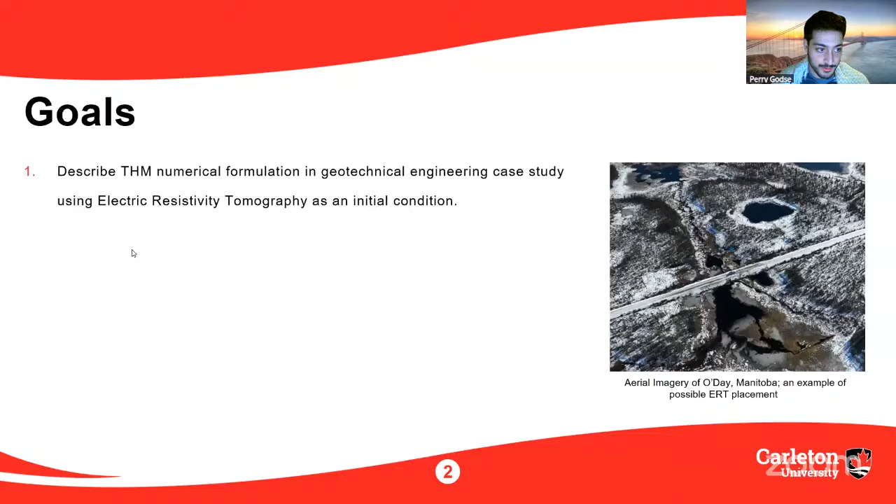Some of the goals I have for this project are to describe THM numerical formulations in geotechnical engineering through a case study using electric resistivity tomography as an initial condition. I want to use the finite difference method on a heterogeneous soil to couple thermal hydraulic behavior, apply thermal hydrodynamic behavior to mechanical coupling, and explore how freeze-thaw-induced changes in hydraulic conductivity feed back on plume migration, and identify where thermal impacts are strongest.

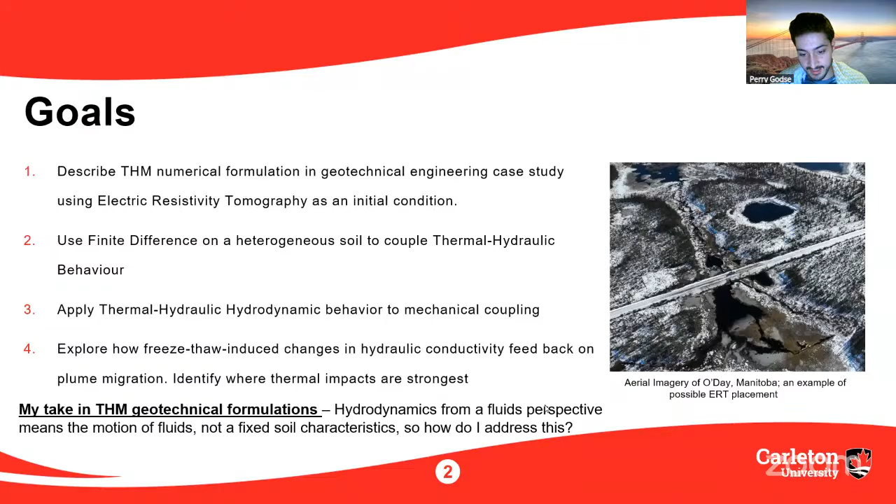My take on THM for geotechnics is that hydrodynamics from a fluid perspective means the motion of fluids, not necessarily a fixed soil characteristic. So how do I address this?

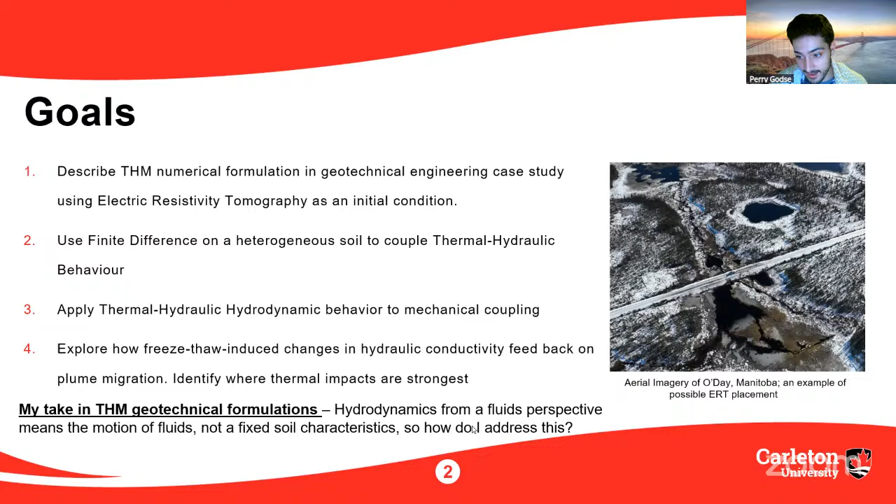Using subsurface terrain resistivity to model THM evolution using this image and the reported soil stratigraphy, we infer and apply constant head to simulate wetland behavior without transient hydrological inputs, apply dual drainage, and model seepage, thermal and mechanical effects with background freeze-thaw settlement and seepage, and then couple it.

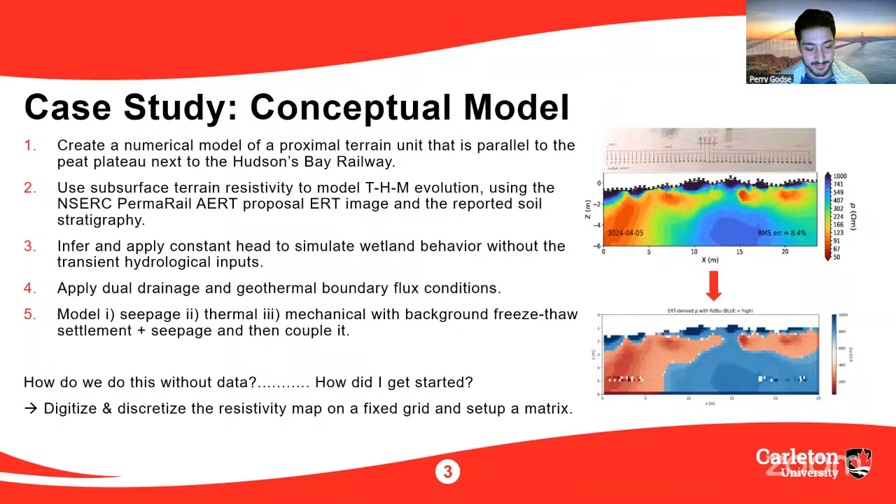So how do we do this with limited data? How do we get started? The first thing is to apply a fixed grid and superimpose it over the image, determine the terrain profile, and then map that onto the fixed grid.

But before we get too deep into this, what is THM and why is it so complicated? Well, THM, really, in terms of coupling, it must occur regardless of how complex it is. For it to be fully coupled, it must be within the same time step.

So we have a lot of parameters here. We can have multi-field coupling: thermal, hydrologic, mechanical processes, which are all interdependent. Each GDE can be second order, first order, whatever you want, and it's coupled with nonlinear terms.

We have multi-scale physics with different time scales, and in terms of different THM approaches, we can have implicit finite elements and finite difference methods. We can have explicit methods. We can have particle methods, like material point method, which somebody else will talk about today. And for THM, we have multi-dimensional behavior, such as 1D, 2D, and 3D.

So today I'm only going to talk about 2D. But the one thing I want to draw your attention to is that THM can be hydraulics, can be thermal, can be mechanical. My approach to looking at this problem is to build it one coupling step at a time to produce a fully coupled finite difference model. But at the end of the day, THM is energy, water, and stresses.

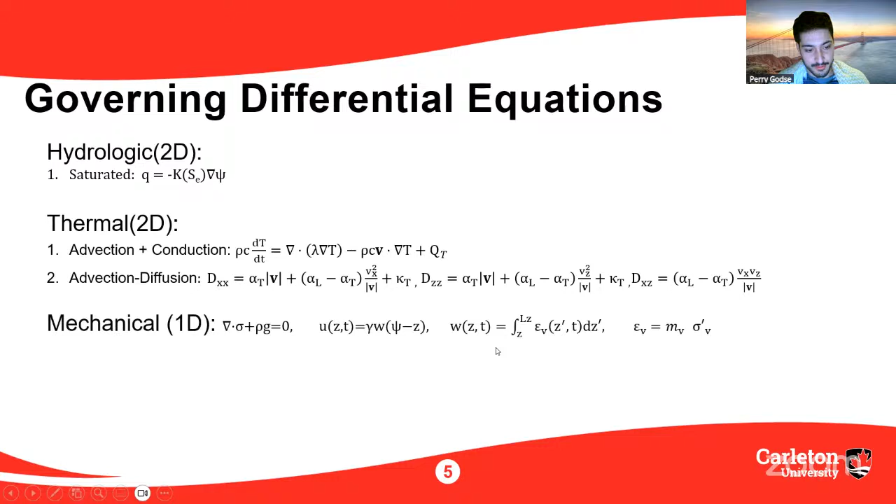So the governing differential equations, the GDEs that I used for saturated conditions, I used Darcy's equation. For the thermal equations, I used advection and conduction, advection and diffusion. And for the mechanical component, I did 1D soil columns where we looked at strains, pore water, settlement, and stresses.

So the boundary conditions, we use dual drainage. In terms of the thermal boundary conditions, we use the thermal penetration wave as both an initial condition and the boundary condition. I call it a boundary condition because at the surface of the soil layer, the thermal penetrating wave, once it hits the surface, it then propagates through the soil.

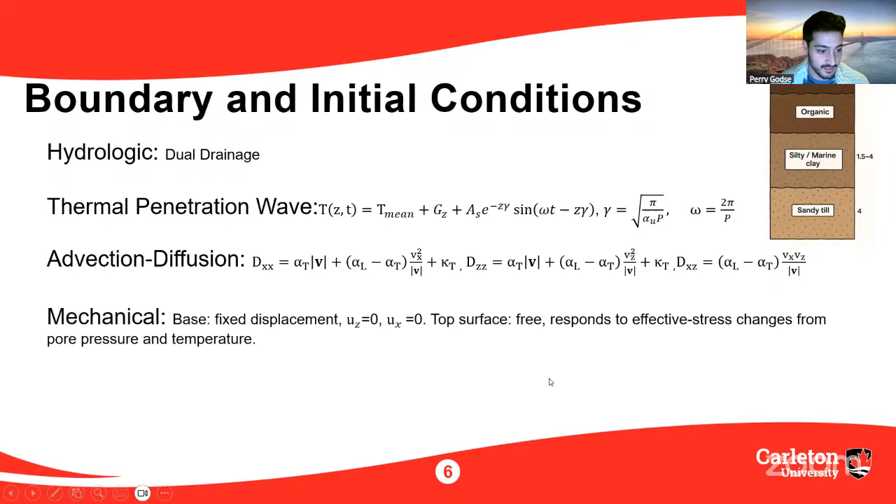So at time 0, it would just be the initial state. And then the same for advection diffusion, where at time 0, if there is no input source, it would just be 0. And then mechanical, it's fixed displacement with a free surface.

And I do want to talk about Archie's law, because in geophysics, one method to relate resistivity to water saturation is using Archie's law. There are some parameters here with some suggested best practices. But at the end of the day, once you compute all this and apply residual water content, you can compute the effective saturation.

So the numerical setup - this is the meat of the numerical model. We have an initialization phase, an outer step, and then an inner step.

So how do we build this? Well, one, build a 2D map. To do this, we import our inputs, read the ERT mask, define the grids, define the time discretization. This was very challenging because the larger the time scale, the more computationally intensive it gets. I chose 5 days - I think that was something reasonable for this model.

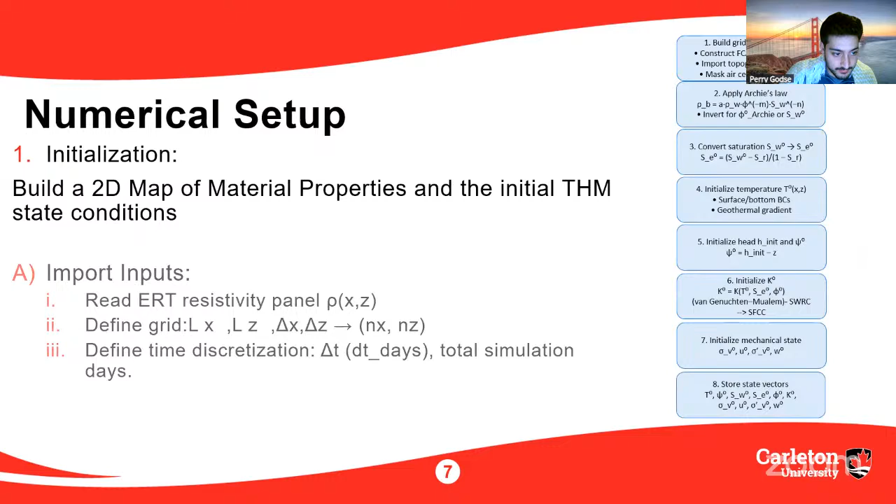So why do I bring this up? Because depending on what your initial temperature is across the depth, and the width of the two-dimensional space, in conjunction with the saturation, it will then dictate the frozen and unfrozen fraction.

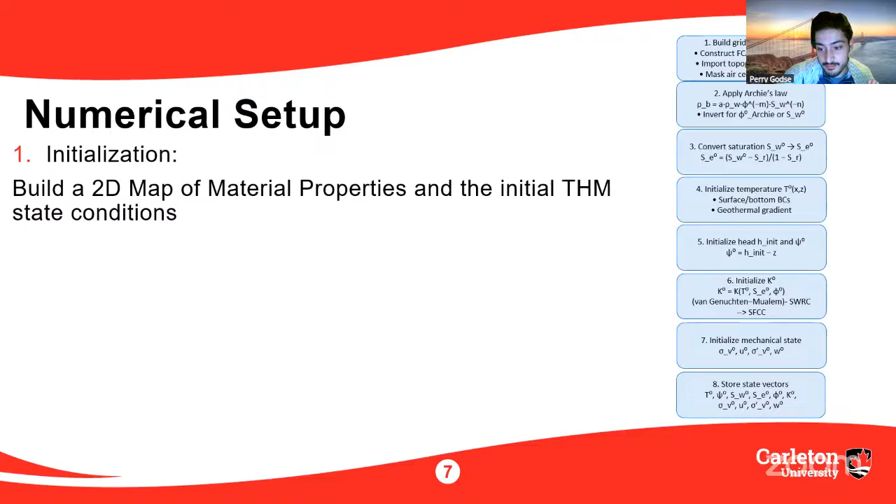This is extremely important for the no-flow boundaries or the partial flow boundaries. This is why I say this sets the freeze-thaw state, because whether it's fully saturated or partially saturated, we then bring in ice content into the mix, which gets a little bit complicated.

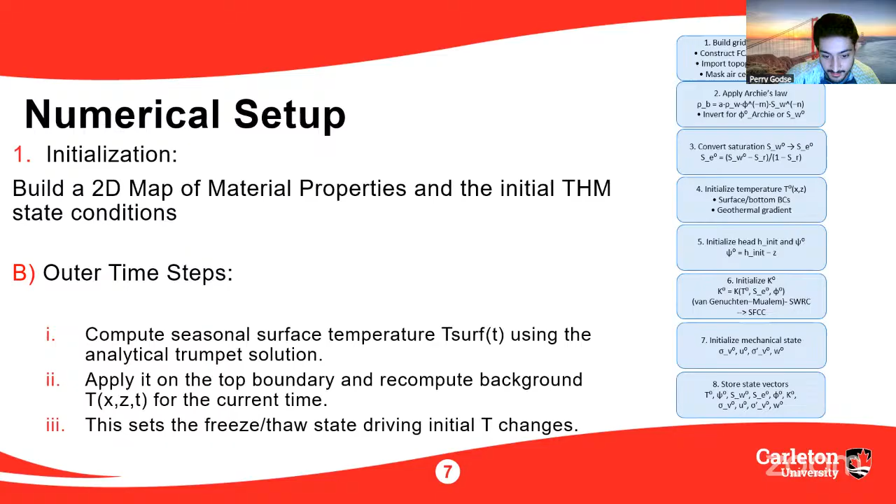Another component of the outer time step, as I mentioned, is the Gaussian plume. For simplicity, I added a plume source at x0, z0 for one of the examples. For the actual model, I used the temperature at near surface and applied it to the hydraulic head, and that in and of itself acts as a thermal plume seeping into the ground.

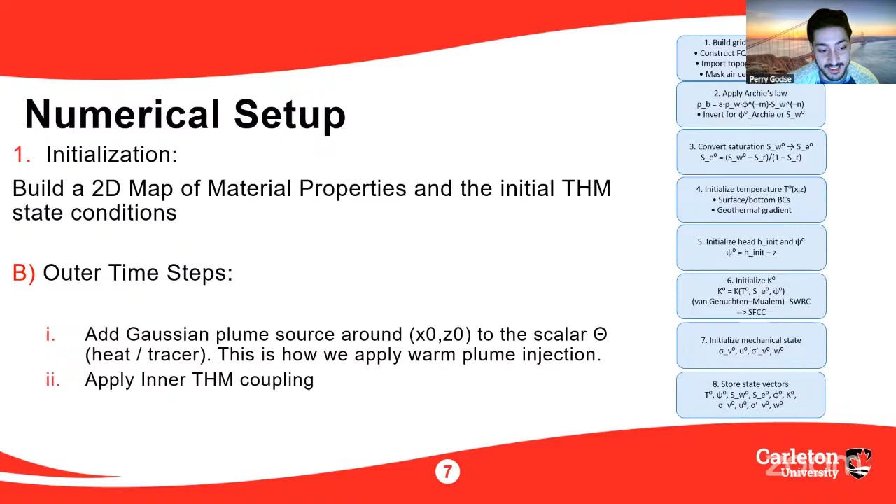This thermal plume is computed based off the fact that we compute the Darcy velocities. So once the Darcy velocities are computed, we then have the plume following the seepage paths and dissipating heat using a Gaussian distribution.

So here it is again. Because we have nonlinear terms in the implicit hydraulic step, what we want to do is an inner Picard loop. We start with our initial conditions, we guess in terms of the plume concentration, we have a porosity, we have our head.

We also use a fixed time trumpet curve to compute the freezing, to define how much pore space is water and ice, and compute the conductivities. And so once we get into the inner loop...

Sorry, one sec, my slides are a bit messed up.

So once we get inside our inner loop, we converge, I think it was 6 iterations. I think I wrote that down here somewhere. One second.

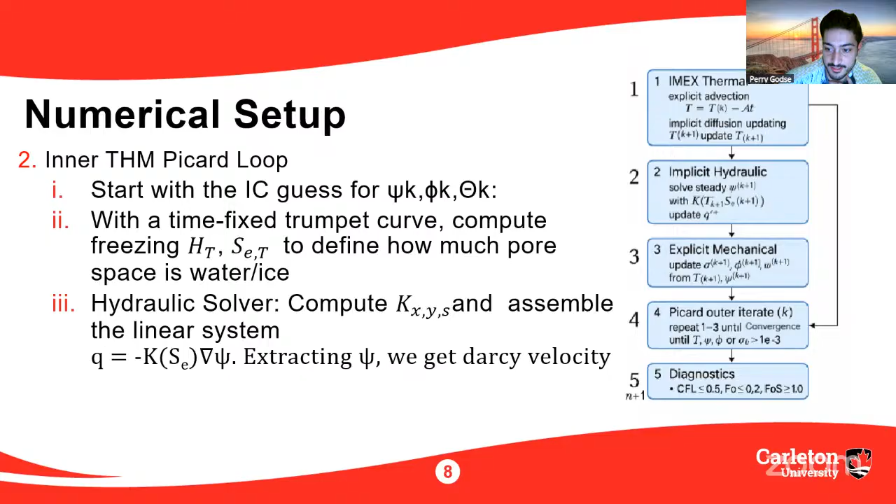Yeah, so for the inner loop, we then resolve the nonlinear parameters imposed by the hydraulics, and basically the way the inner loop works is because of the hydraulics itself.

To compute the explicit part, we use the initial k, and then we propagate that throughout the fixed grid. Once we propagate that through the fixed grid, what happens is we're not going back and updating k.

So then we do need to converge on the other properties that we computed. And that's where we update porosity, compute pore pressure, compute total and effective stress, compute volumetric strains, and recompute void ratio, gamma dry, gamma sat.

For diagnostics, I looked at the critical hydraulic gradient between each cell. And for numerical stability for the explicit portions of the THM formulation, I looked at the CFL, the Fourier number for dispersion, and the residual water content and factor of safety against piping.

So now that we have all this, let's get into building this THM. This is the fun part. I wanted to show you guys a little bit of how we can transform what we did in class with the sheet pile example into a thermal hydraulic problem.

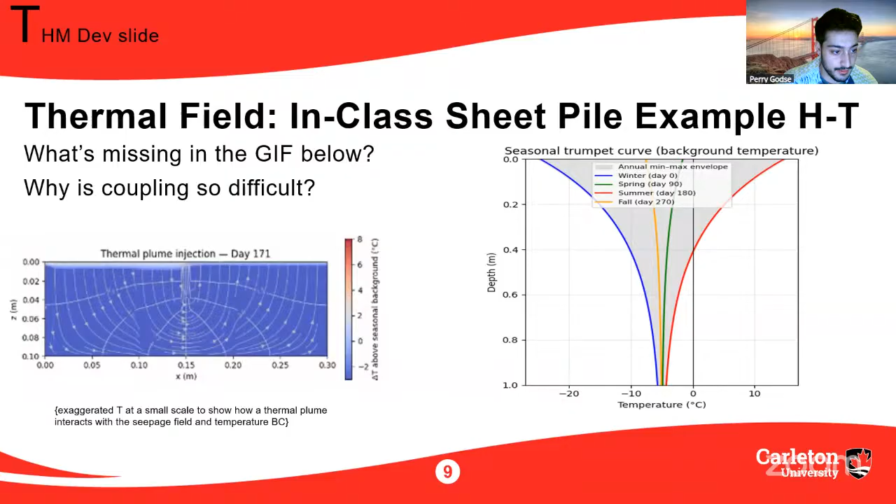Now what we see on the left here is a GIF of a thermal plume injection of, I believe, 15 GPM at 8 degrees Celsius. Mind you, the sheet pile is just a no-flow boundary, so we just assume, for sake of argument, that it's filled with soil.

Now we see how, when we inject 15 GPM at 8 degrees Celsius, the plume propagates as the soil freezes and thaws. Now, what exactly is missing?

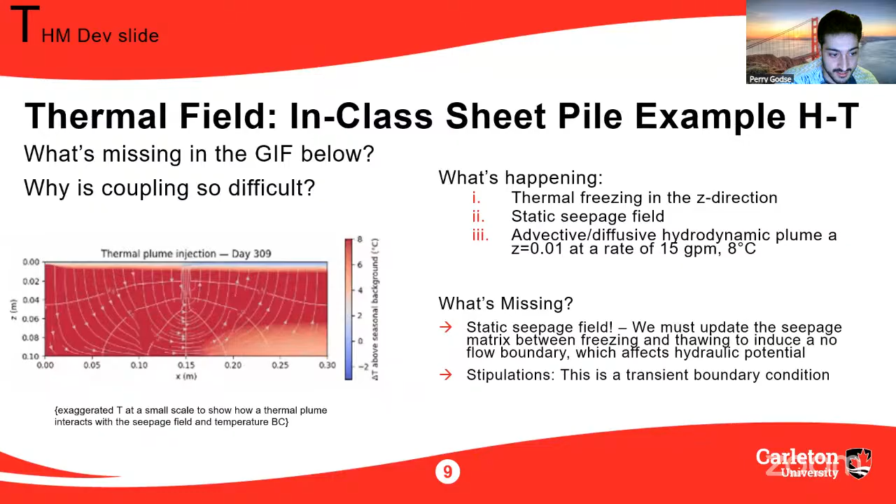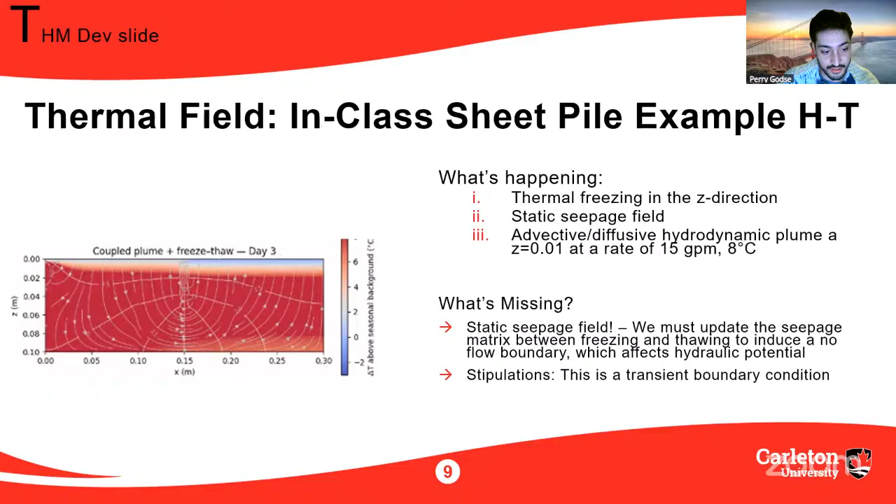Well, the seepage field is static, so how do we fix this? We need a dynamic seepage field. The reason the dynamic seepage field is so important is because our no-flow boundary—we started off with dual drainage, for example, and it transforms into a situation where you have no flow due to freezing.

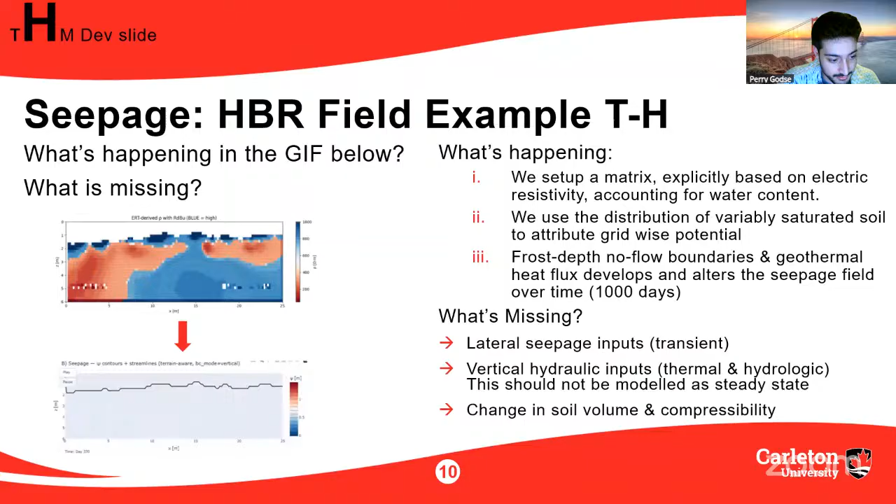Now, one of the issues I had when building this was that I probably should have used the material point method to better represent the large model strains. But for a finite difference example, what I decided to do was represent the settlement and the change in effective stress using a color map. So this is kind of how I showed the outputs.

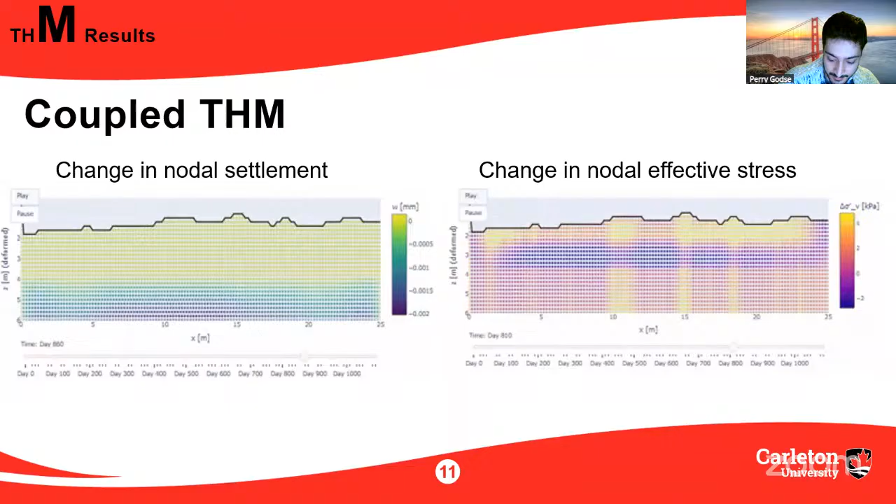So one of the questions I had going into this THM formulation was to understand the advective heat fraction and its impact on the heat transfer in the soil—how much do thermal plumes impact freeze-thaw versus just conduction?

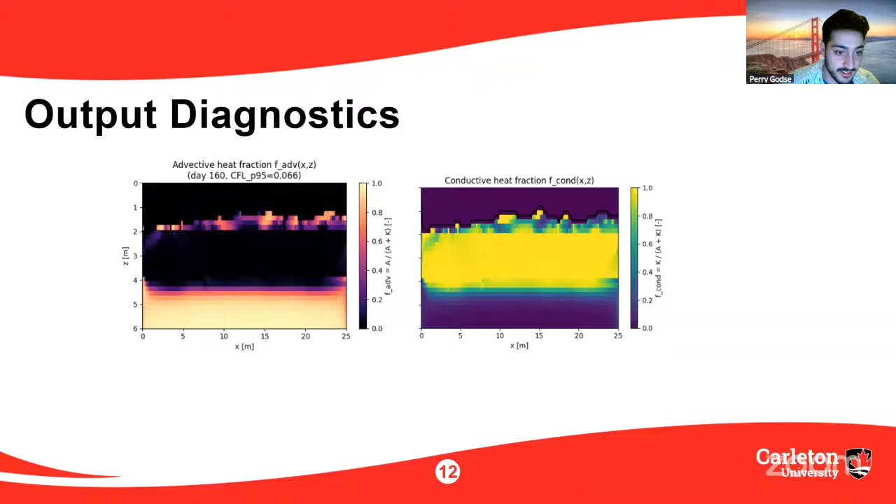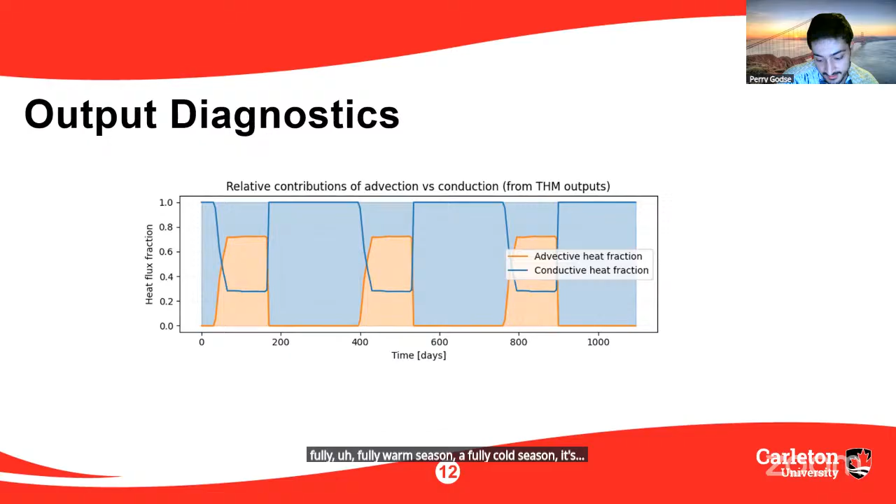What I found here is the near surface, or active layer, is actually dominated, as we can see by this chart, by advective effects, while when we are in a fully warm season or fully cold season, it's dominated by conductive behaviors.

So as we have our THM solution, with freeze-thaw, seepage, and all these THM effects, at the end of the day, using the fixed grid finite difference method, I was able to calculate the hydraulic gradient and the critical hydraulic gradient between each neighbor and figure out the most susceptible paths. This could be useful for determining the emergence of taliks, sinkholes, and so on.

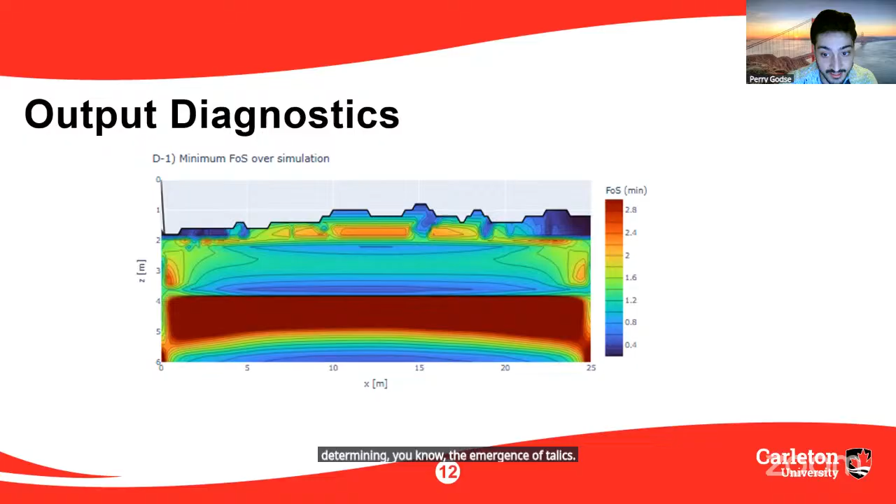So based off this, how do we calibrate it? The calibration kind of goes beyond the scope of the THM formulation, but I classified this between numerical calibration, measured calibration—different parameters we can calibrate and tweak—and then physical calibration, for example hydraulic conductivity, Van Genuchten parameters, and so on.

So if I wanted to calibrate Van Genuchten, this is just one example workflow of how we could iterate through calibrating a model.

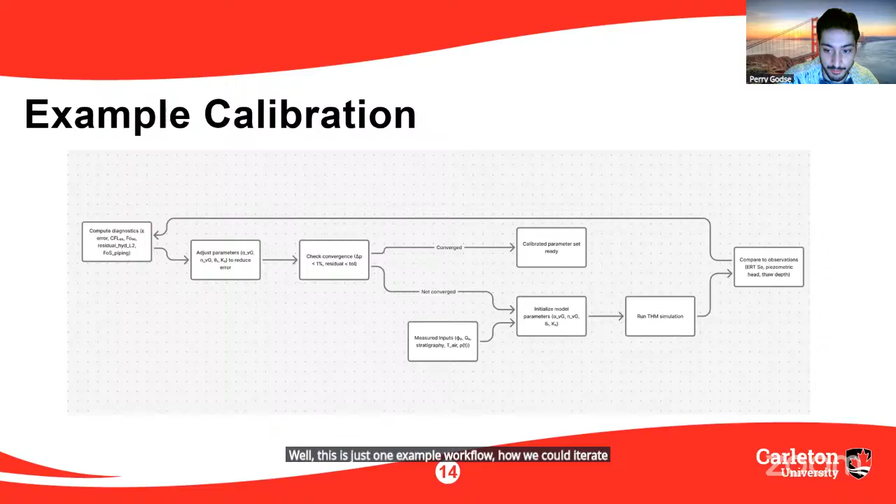So I know my code doesn't really fit in this paragraph, but yeah, that's my project, and thanks for listening. Thank you very much.

So you went the extra mile there making all these simulations. Congratulations. Does anyone have a question for Perry?

We'll try to keep it short, but what was the time step that you ended up choosing there? Five days? Okay.

It's not appropriate, I'm going to be honest. I think the appropriate time step should be 12 hours. But when you look at any type of model, you have to balance your spin-up time—how far back do you go, how far in the future do you go?

I valued a longer runtime over a shorter but finer runtime, because I wanted the model to evolve more so I could see how it behaved instead of having a short model that behaved perfectly. I wanted to see multiple freeze-thaw cycles, so the idea for me was to get 3 years, about 1,000 days. If I did 12 hours, I would not even get a whole year.

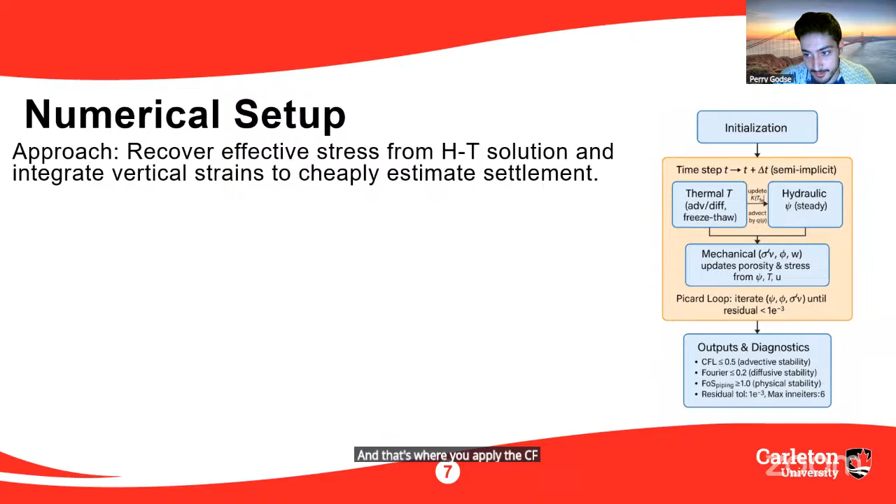So what exactly is the appropriate limit of convergence? And that's where you apply the CFL number. Okay, I see.

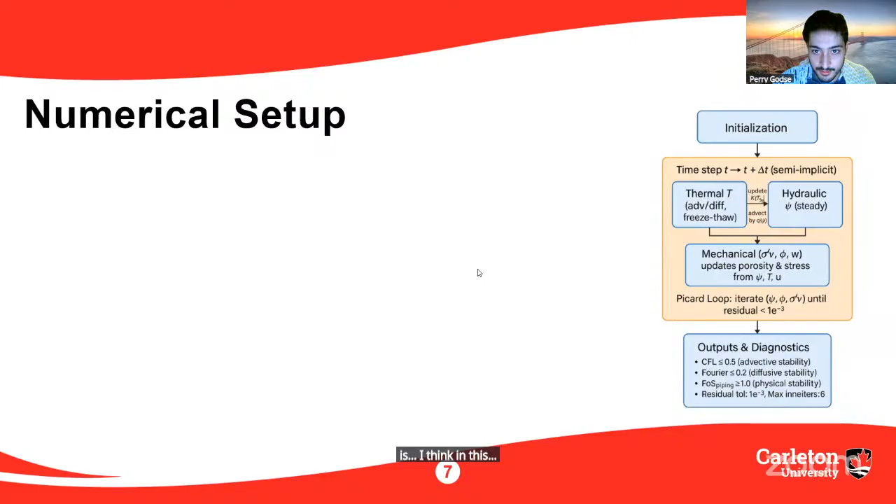And so here for convergence checks, there's head, porosity, I used a bunch of them, because overall, this is what makes THM so complicated, I think in this model there's 28 parameters. And so the parameters, depending on, hold on, I'm just going to stop sharing for a second.

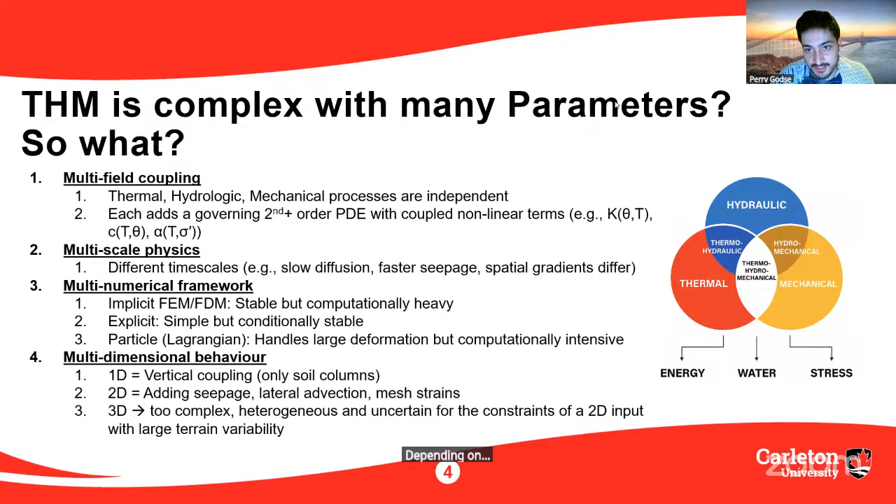Depending on what you're modeling, or what your output is, that has to converge, your parameters have to converge. It's not just, if I compute hydraulic head, or say we're doing a seepage field, right? It's not just the seepage field has to converge. All of the parameters within the field have to match because you compute everything.

And so in my approach, that's why I store the initial state variables, and then I update the state variables. Got it. So one of the things that helped me here, and Professor, I love Google Colab, is that I have a very large Google Drive folder.

I start with my initial state. After I have my initial CSV with my initial states, I have maybe like 24 columns. Then I compute everything, a new output, and every time step I just add new entries, and test if they converge. If they don't, then what I did is I just overwrite them until convergence, and then I have a diagnostic output which checks it for me.

Yeah, I see, very good. I hope you guys enjoyed that. I spent a lot of time on it, and I still get confused by it. It's one of those tricky topics, but yeah, thanks. Thank you very much, thank you.

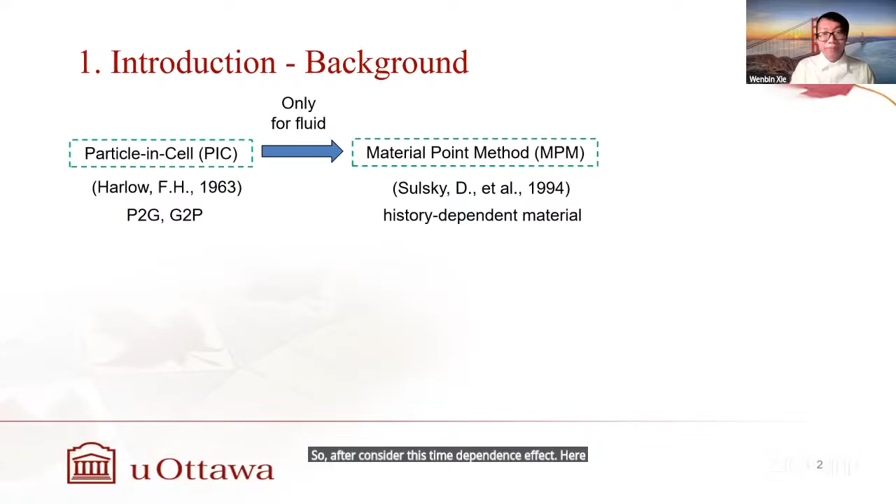Based on the MPM, for slope stability analysis and other geotechnical engineering applications, the GIMP, Generalized Interpolation Material Point, is a framework developed for engineering use in practice. It can do large size simulation, crack development analysis, and also get the safety factor according to the strength reduction method, etc.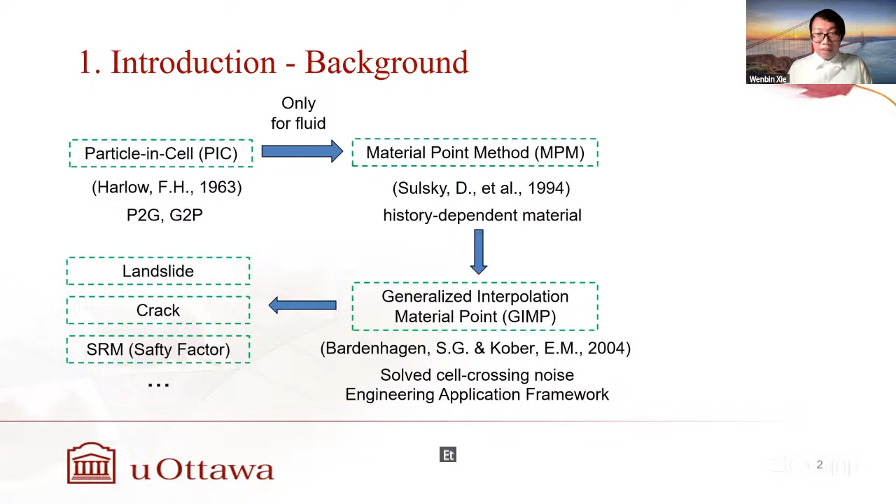The GIMP can also be developed into a more accurate model called CPDI. It considers a deformable domain, whereas GIMP's domain is fixed. CPDI's deformable domain is a little bit more complex, but more accurate.

In my study, I just want to focus on this GIMP framework because it is very easy for us to use.

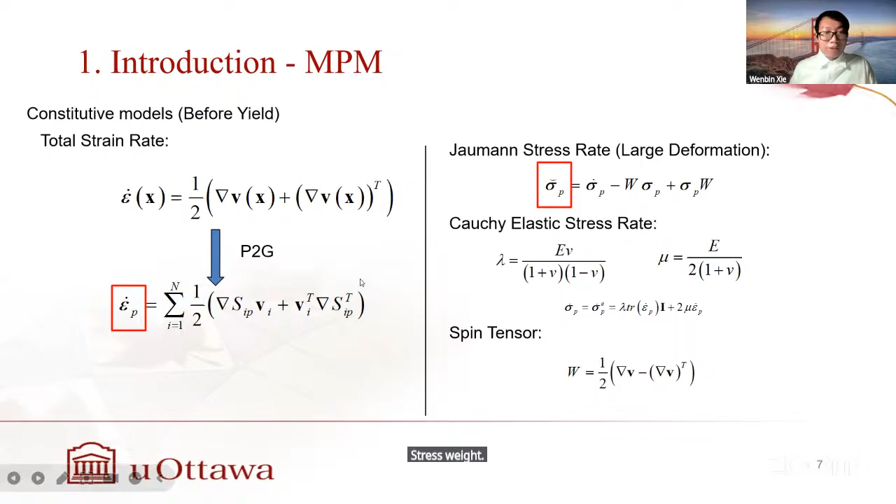First, we need to find the total strain rate, which is used for updating the strain later on. Then, because we are dealing with a large deformation problem, we consider the Jaumann stress rate for the elastic part. Then we need to have the yielding criterion.

Then, with that basic theory established, we can go to our GIMP framework.

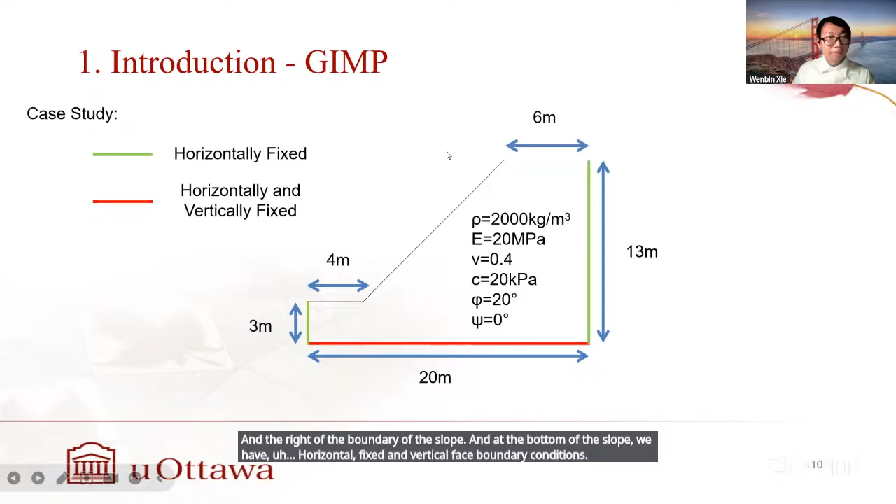The step one of the GIMP is the initialization. There are two ways to do the initialization. First, you can do the finite element analysis first and create the initial stress field according to the output of the FEM. You can extract the node location information and the corresponding stress for the MPM model.

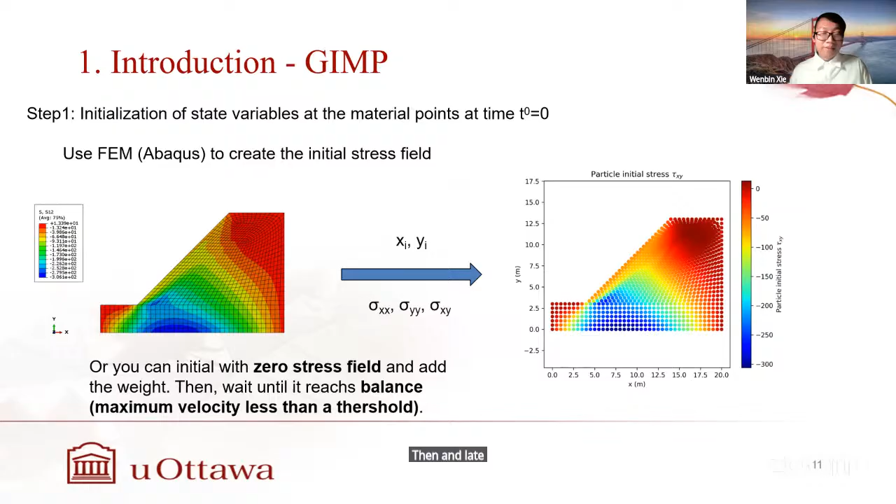Or you can just initialize the stress field with 0, then apply the weight and wait until it reaches balance. After this, you need to generate the background grid. In this step, it's very important to define the mesh density of your grid, like dx here. You can use a mesh study to find the best dx.

Next step is to determine the nodal mass and the momentum. The nodal mass and momentum at time k is given by these two equations.

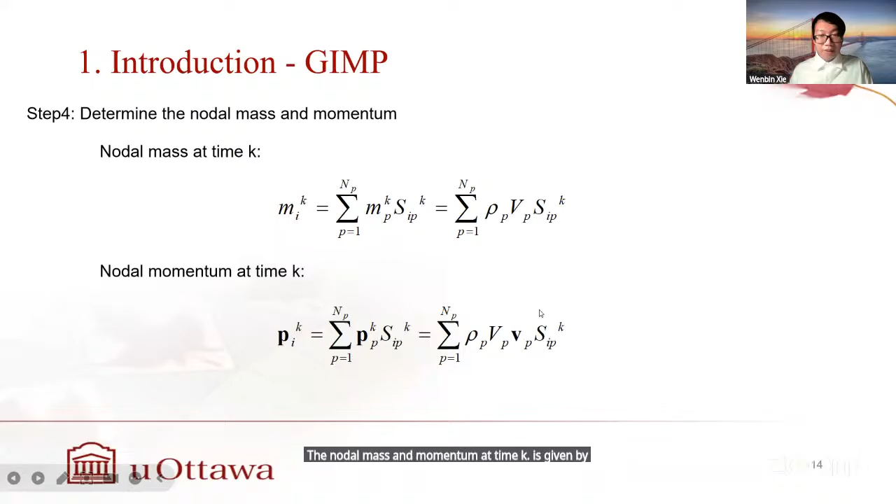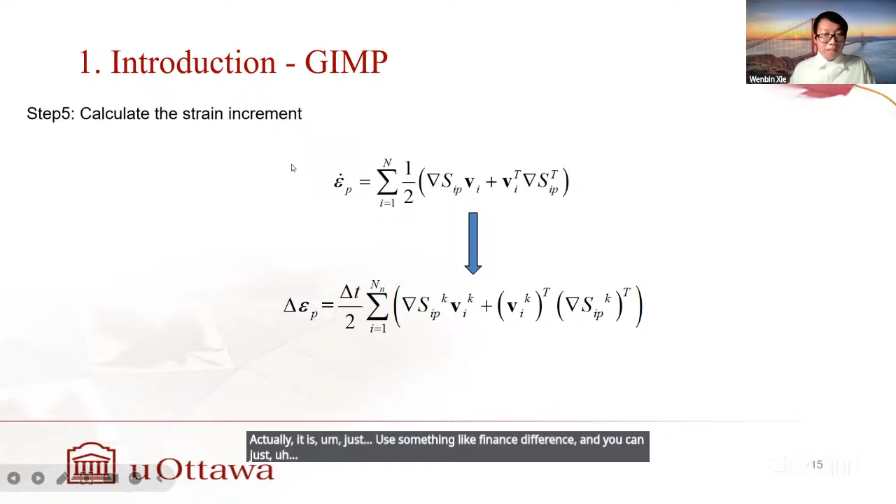Then you need to update the strain. Actually, it is just like finite difference, and you can calculate the strain increments by multiplying by your time step.

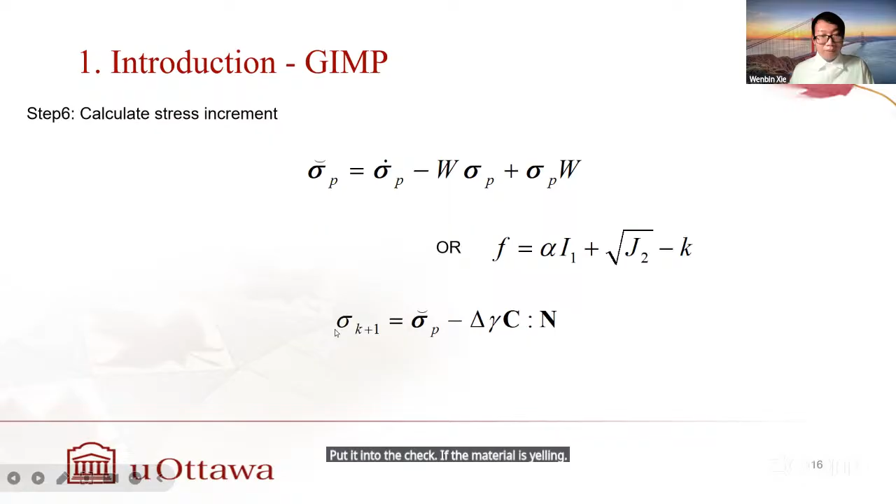Step 6 is to calculate the stress increment. If the material is in the elastic zone, you can update the stress by the Jaumann stress rate. Once you have the elastic stress rate, you need to put it into the check. If the material is yielding, you need to update your stress with this plastic stress rate.

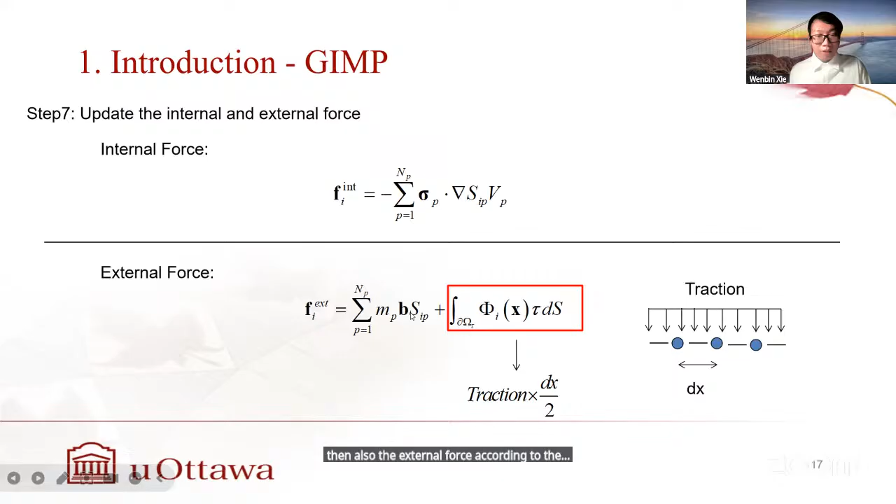Then you need to update the internal force according to the stress, and also the external force according to the body force and the traction. Now you can update the velocity according to the internal and external force. Then you can also update the position according to the velocity.

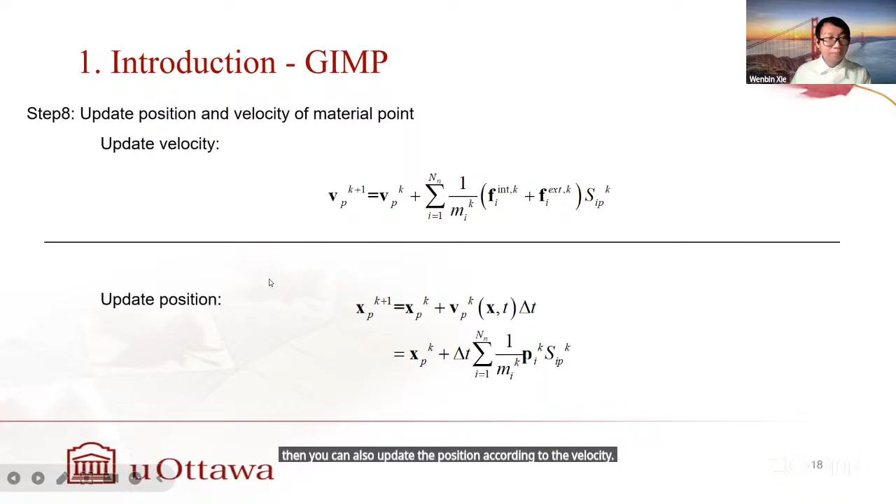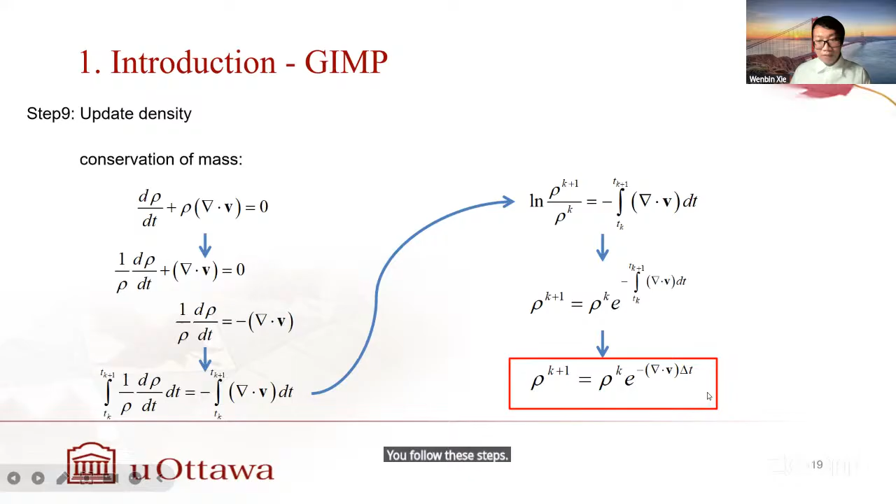The last thing you need to update is the density. It starts with the conservation of mass, and following these steps, you can get this function to update the density of your model.

The final step is you need to repeat step 4 to step 9 until the time reaches the total time we define at the very beginning of the analysis. This is the whole GIMP framework, but we still have 4 things that need to be figured out.

Then how to apply the boundary conditions. In GIMP, if you want to fix the particle in X and/or Y direction, you just set its velocity equal to 0, so it will make the particle not move. It will act like a fixed effect.

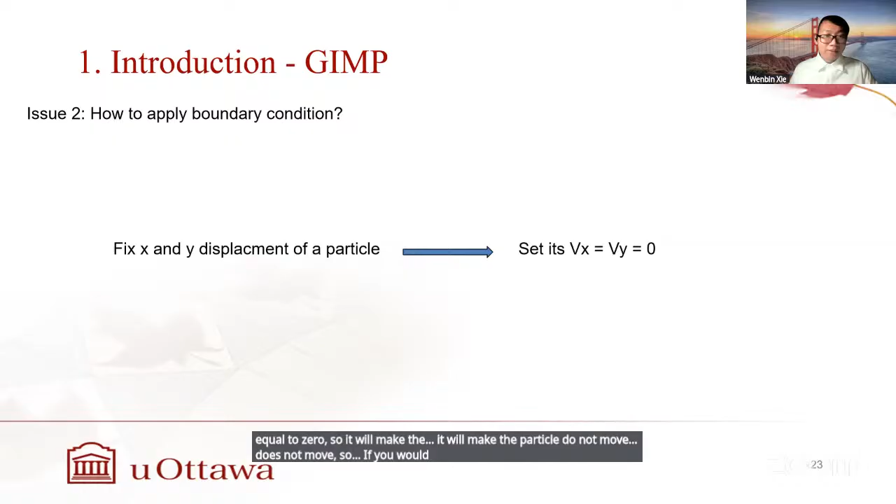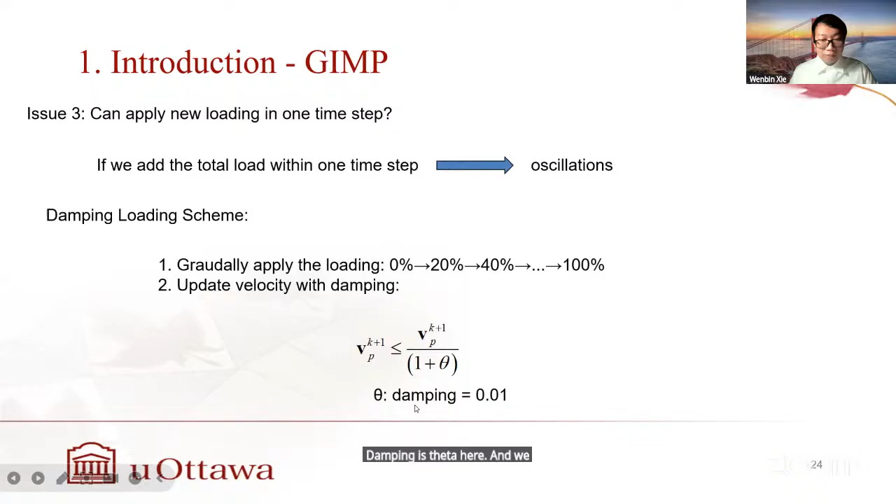Next, how can we apply the loading? If we apply the loading within one time step, oscillation will occur in our outcome. So we need to have a damping loading scheme. First, you need to gradually apply the loading within several time steps. Then you should update the velocity with the damping, theta here, and we often use it equal to 0.01 as default.

Issue number 4: how can we trigger the landslide? The trigger of the landslide is based on how you initialize the stress field. If you initialize with a zero stress field, you wait for the model to reach balance, and then gradually reduce the cohesion of the soil to 0. Or you can initiate the stress field with an unstable stress field and gradually apply the weight, waiting for the landslide to occur.

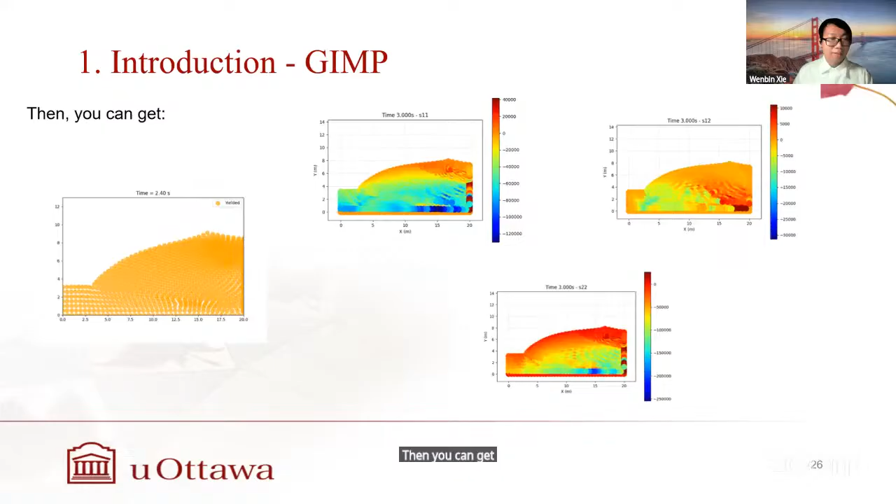Then you can get this fantastic landslide simulation. But for us engineers, we are more interested in the safety factor. How can we get the safety factor based on MPM?

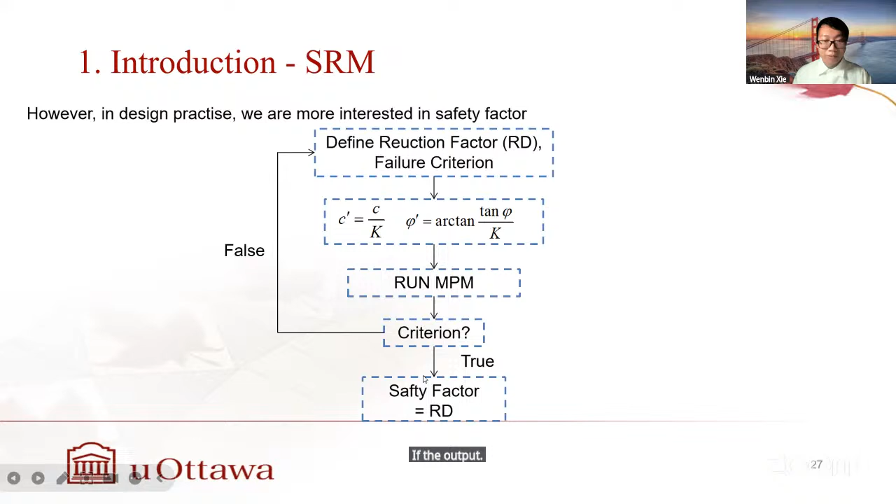Actually, it borrows the idea from the strength reduction method. First, we need to define a reduction factor, and we also need to define a failure criterion. With this reduction factor, you reduce the cohesion and friction angle of the soil, and run the MPM to check if the outcome meets the failure criterion. If not, you redefine a new reduction factor and run the MPM again and check again. If the output meets the criterion, the safety factor equals your newest reduction factor.

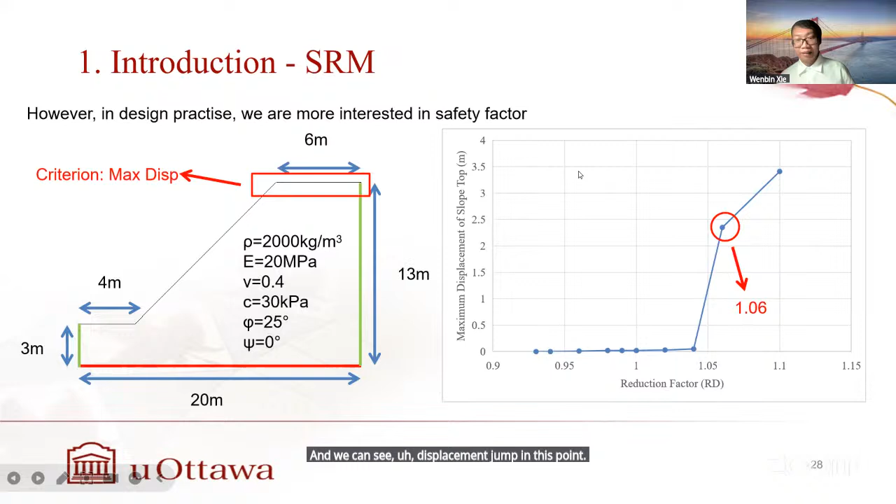In our study case, I slightly increased the c value here, and my criterion is the maximum displacement of the slope top. I generated these figures, which show the reduction factor versus the maximum displacement. We can see the displacement jumps at this point, so we can say this slope has a 1.06 safety factor.

According to the introduction, we can draw this conclusion. First, the material point method can solve slope stability analysis, and with the particle-to-grid and grid-to-particle philosophy, it is very efficient to deal with large deformation problems, which finite element methods cannot do very well. By borrowing the idea from the strength reduction method, we can get our safety factor based on MPM. MPM also has broad application prospects in geotechnical engineering. Future study can develop more accurate algorithms and deal with more types of analysis, like coupling analysis and dynamic analysis. This is the references for my study, and thank you for listening. Any questions?

Thank you very much, it was very interesting. Any questions? I have a question.

So the basis behind MPM is really Green's theorem, and I guess the question I want to ask is, does the particle size influence the outcome? Yes, the particle size will influence the outcomes. In my practice, I tried so many different sizes of particles, and I find that if you set it larger or smaller, it will give you different outcomes. I tried a lot and found the particle size that gives the outcome exactly what I expect.

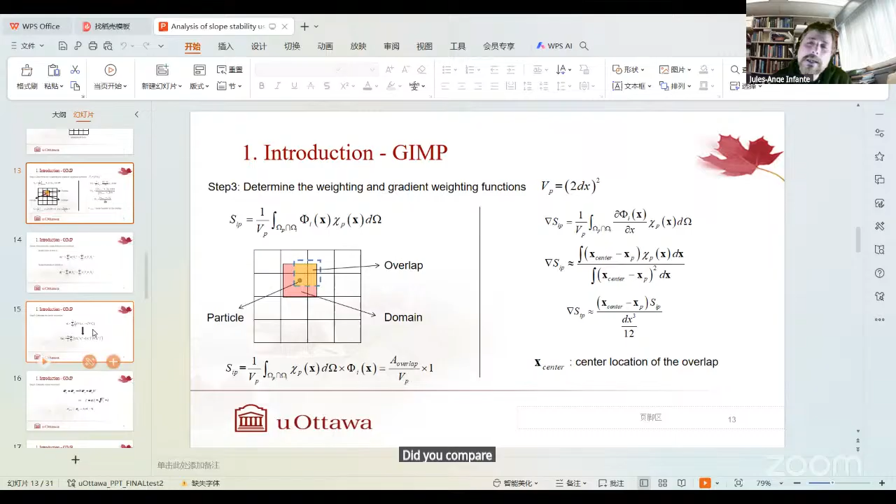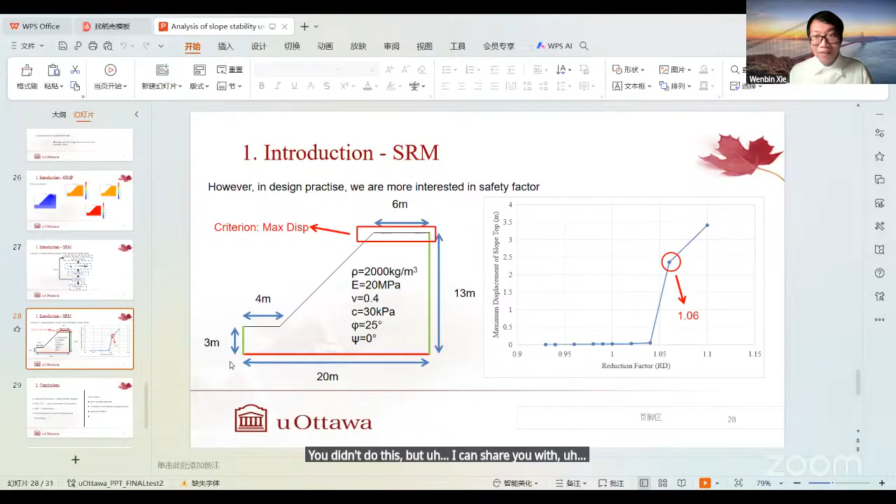You found the factor of safety for that slope. Did you compare that factor of safety with the factor of safety you'd get for the same slope using standard software, like SlopeW or similar, that uses the standard method of slices? Just to have a benchmark, do you get a similar result or not? It didn't do this, but I can share with you. It's always a good idea, whenever you do these kinds of studies, to compare with a standard method and see if it compares well, or if it gives something very different. Yes, I agree, that's a good suggestion.

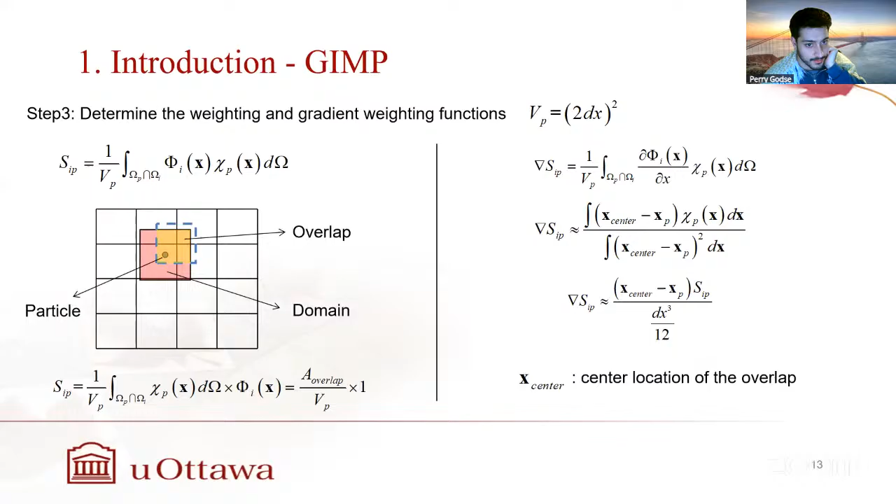I actually have another question. So you said you computed weight factors, the weighting function. Can you just explain quickly the weighting function again, like what it does?

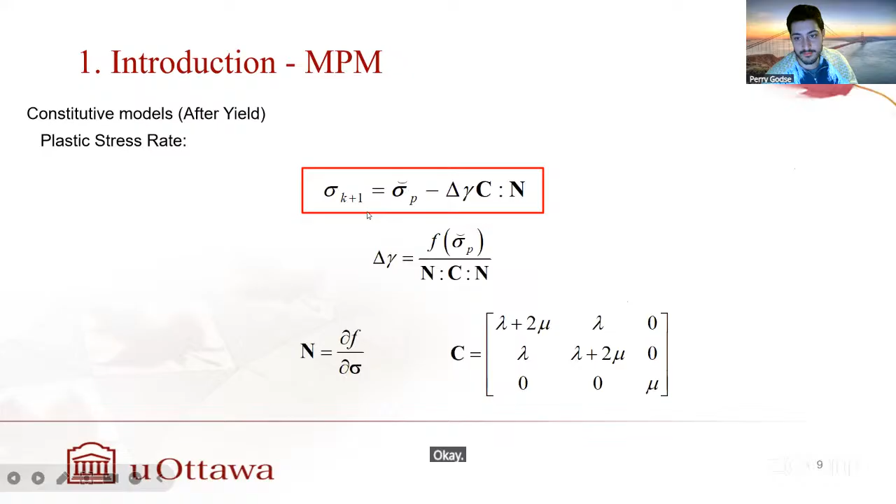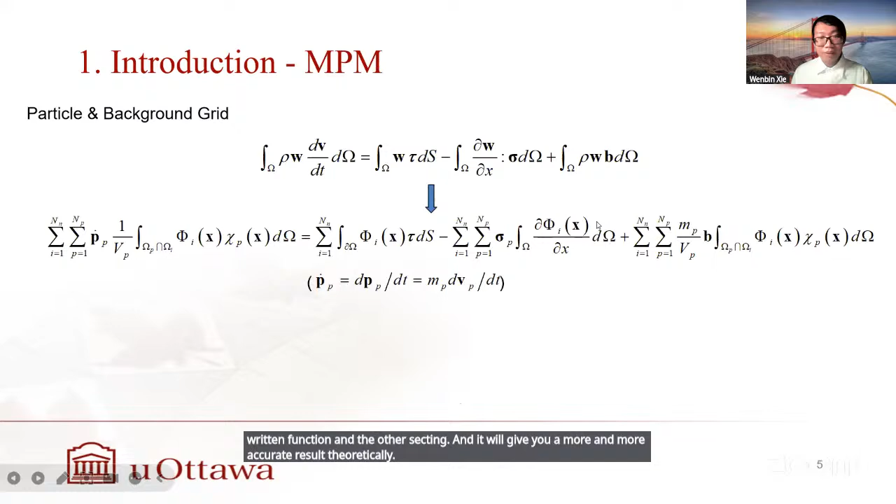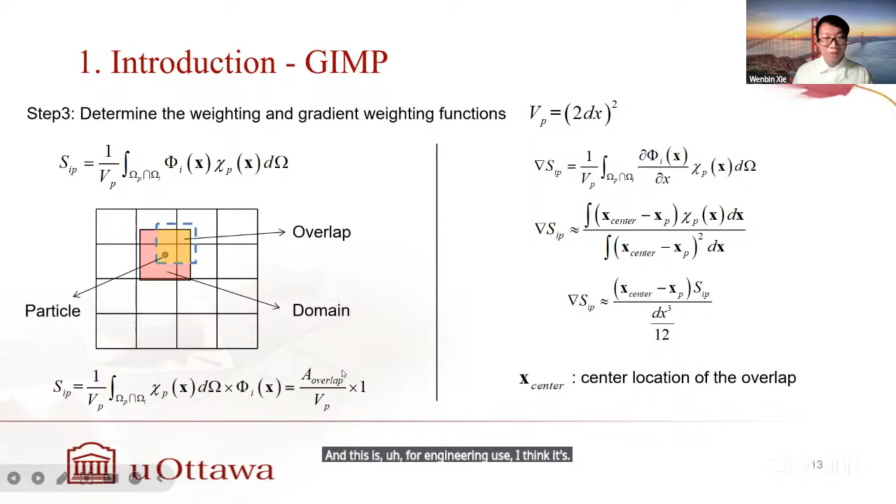The weighting function is equal to 1 for the location exactly on what you target. At one point you said you essentially iterate the weighting function until it meets your criterion. Does the iteration on the weighting function impact the factor of safety? Yes. I mentioned CPDI in this paper, which has a more accurate weighting function and other settings, and it gives a more accurate result theoretically. For GIMP, we can only use this single way to get approximate results. For engineering use, I think this is enough, but for study, you can use a more accurate model, though it will be more complex.

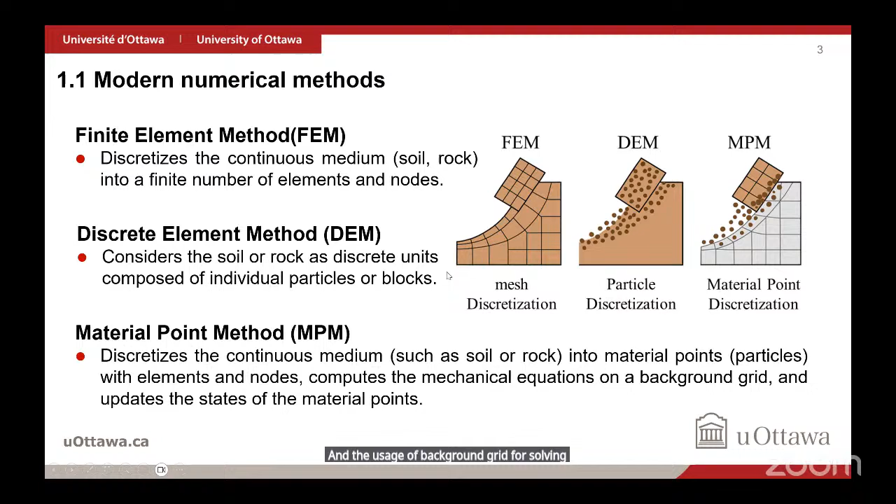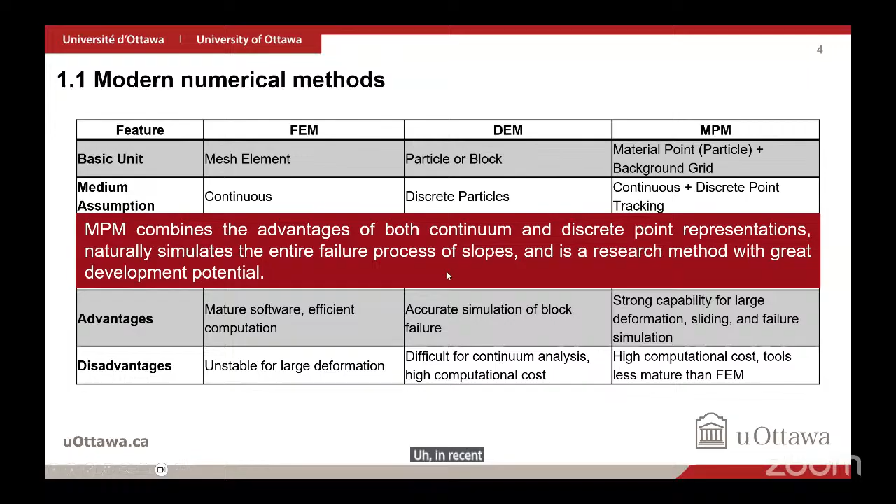The material point method combines the advantages of both. It uses material points to store physical quantities and uses a background grid for solving equations. I summarized the comparison of the 3 methods in the table. Overall, the material point method can naturally simulate the entire failure process of a slope while avoiding mesh distortion, giving it strong potential for future development. In recent years, it has received increasing attention in geotechnical engineering.

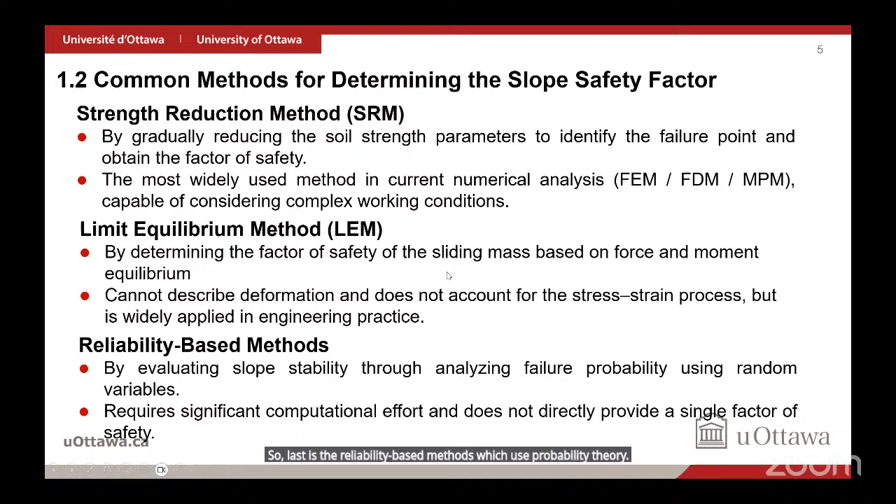Next, I want to introduce common ways to determine the slope safety factor. First, the strength reduction method: it reduces soil strength parameters until failure occurs. It is the most widely used method because it considers strength behavior. Next is the limit equilibrium method: it calculates safety factors using force and moment equilibrium. It doesn't consider deformation, but it's common in practice. The last is reliability-based methods, which use probability theory, but they require heavy computation.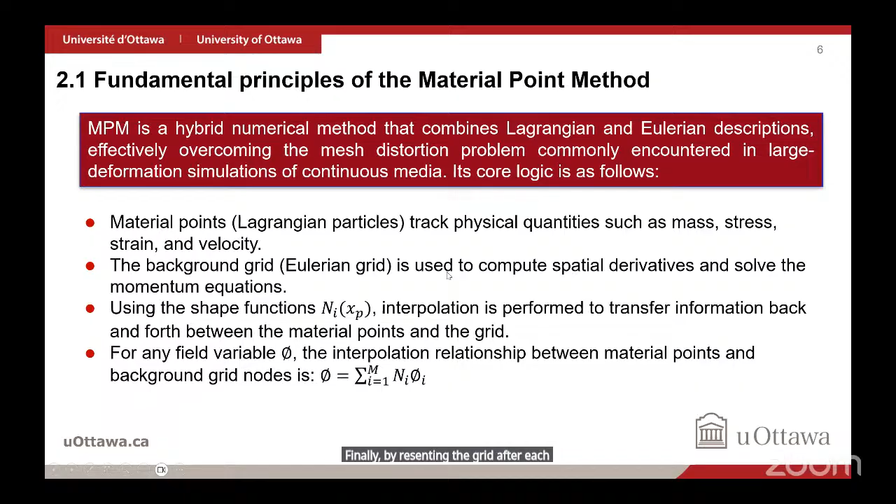In this part, I will focus on explaining the principles of the material point-based strength reduction method. The core logic of the material point method can be summarized in 4 key steps. First, material points are used to store physical quantities such as mass, stress, and strain. Second, a background computational grid is employed to solve the governing equations. Third, during each timestep, information is mapped back and forth between the material points and the grid. Finally, by resetting the grid after each step, mesh distortion is avoided and numerical stability is maintained.

I think using some figures may help make this concept easier to understand. Simply put, the essence of the material point method is to separate information storage from numerical computation, treating them as 2 independent components. These 2 parts then exchange information at each timestep. Any distortion that occurs during the process is removed by resetting the computational grid at the end of every timestep.

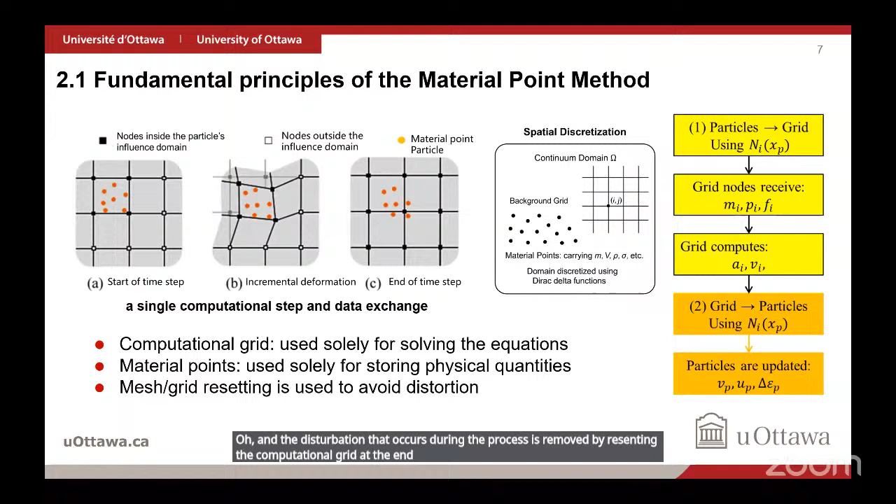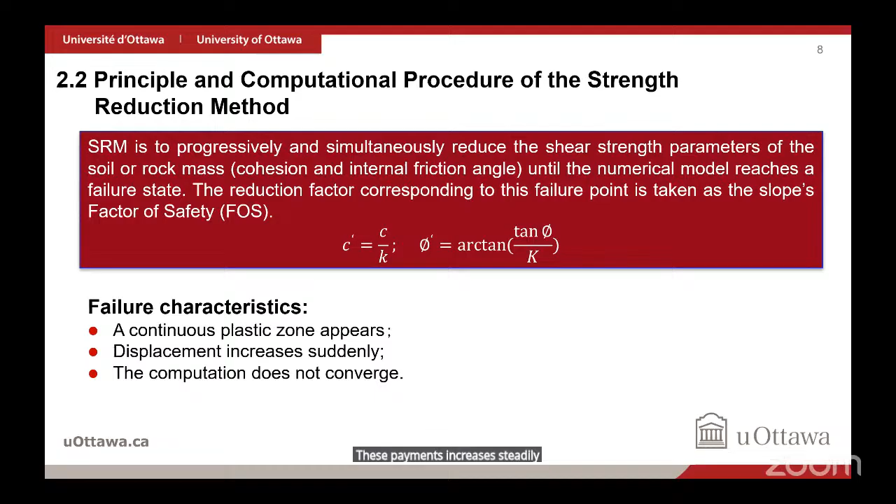The strength reduction method determines the factor of safety by gradually reducing the shear strength parameters of the soil or rock until the numerical model reaches a failure state. The reduction factor at the moment of failure is taken as the slope's safety factor. Usually, failure is identified by 3 indicators: first, a continuous plastic zone appears; second, displacement increases suddenly; and last, the computation doesn't converge.

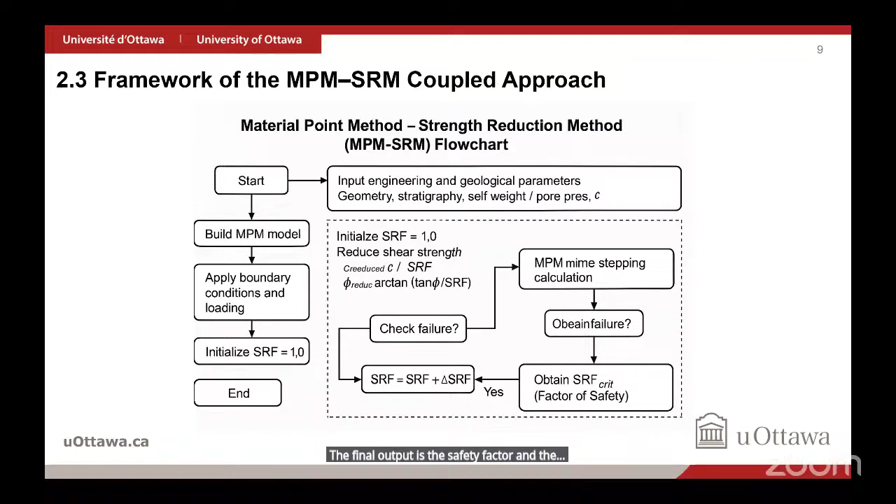This slide presents the overall workflow of this method. It includes strength reduction, grid particle mapping, solving equations, and updating particle states. The final output is the safety factor and the deformation pattern.

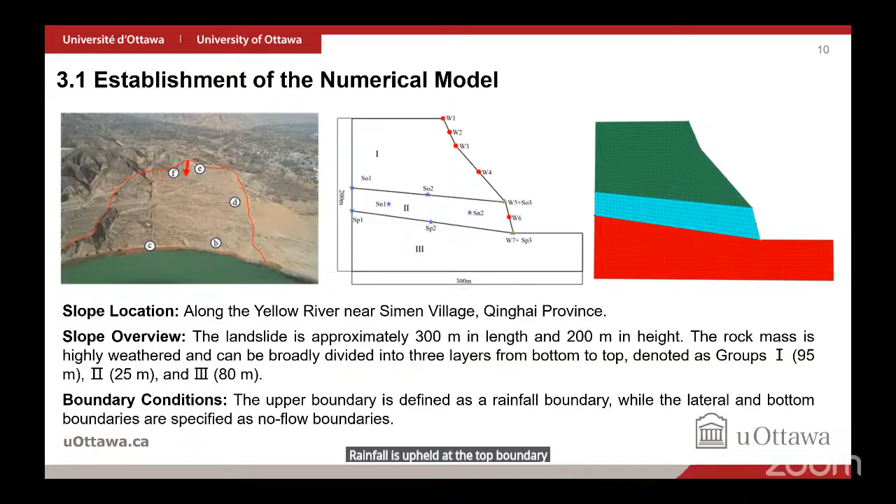The case is a landslide along the Yellow River. The slope is about 300 meters long and 200 meters high. The rock mass is highly weathered and divided into 3 layers: Group 1, Group 2, and Group 3. Rainfall is applied at the top boundary, and the side and bottom boundaries are no-flow boundaries.

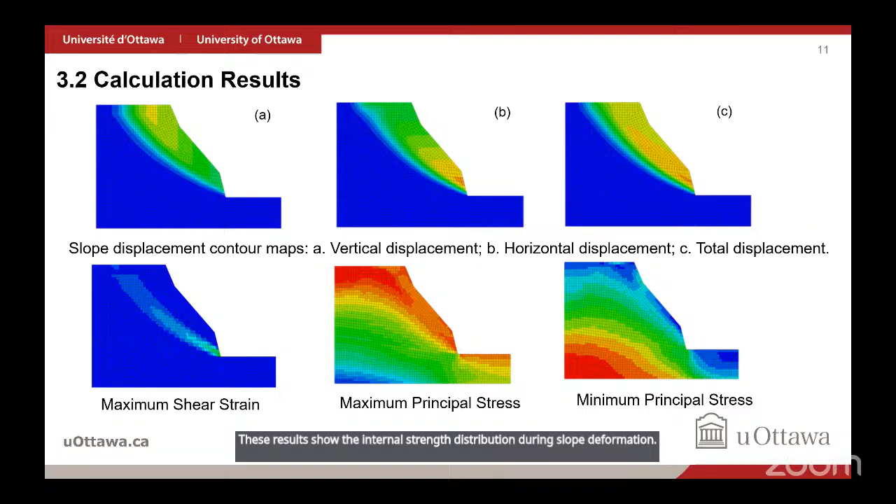Here are the results of the numerical simulation. These results show the internal stress distribution during slope deformation. The plastic strain contours indicate that a continuous plastic zone develops from the middle to the bottom of the slope. This is consistent with the expected failure mode.

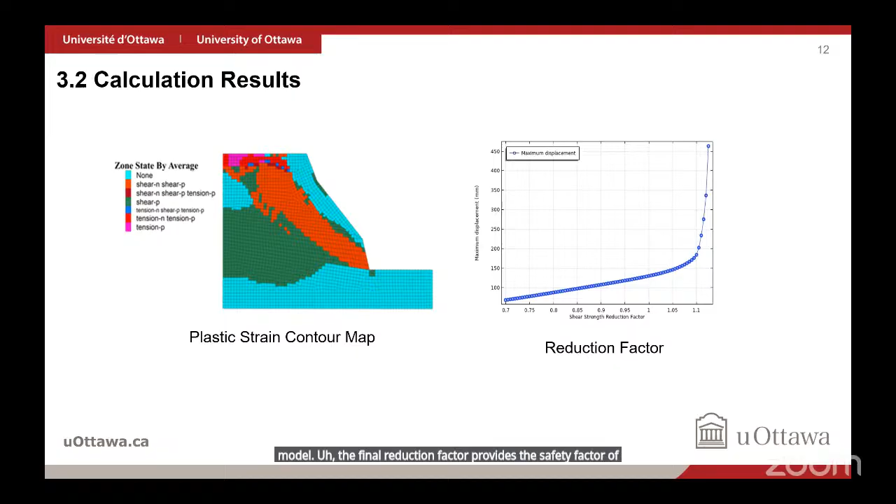The final reduction factor provides the safety factor of this slope. To conclude, this method is effective for evaluating slope stability. Compared with the finite element method, the failure criteria are more physically based.

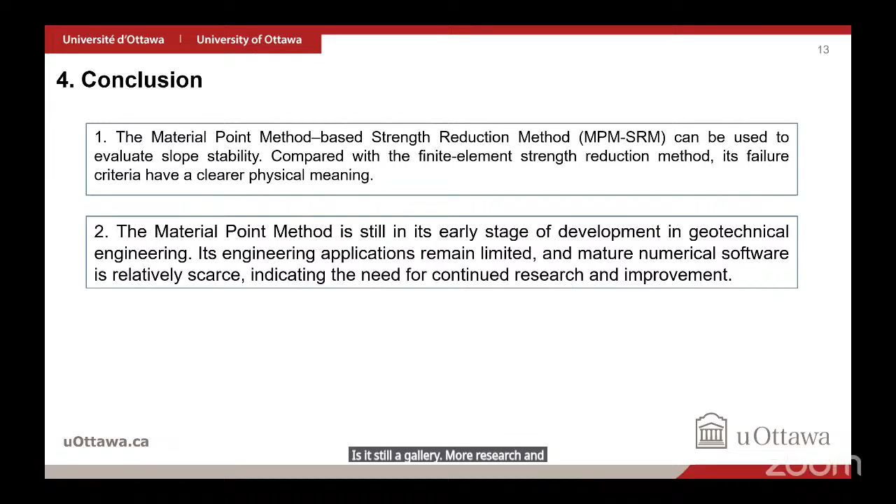However, it is still developing in geotechnical engineering. Its engineering applications are limited, and mature software is still scarce. More research and improvement are needed. This is the reference. Thank you for listening.

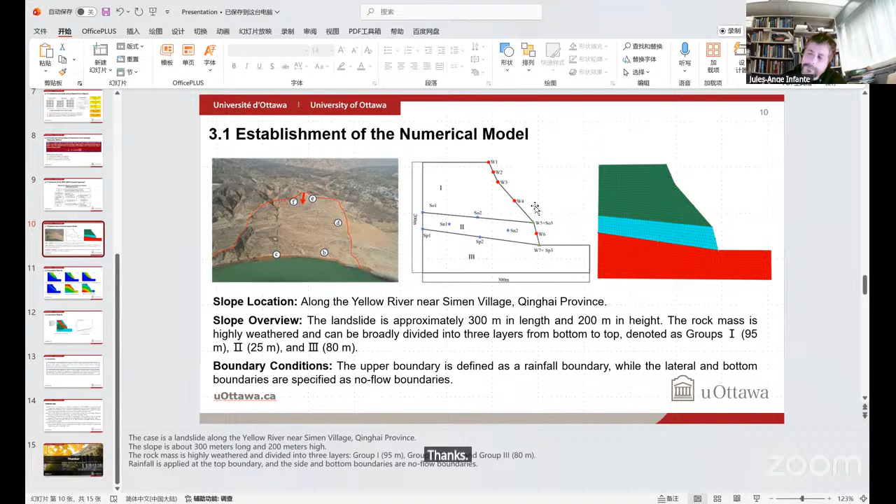Thanks. Any other questions? I will ask the same question that I asked before. Have you had the opportunity to compare the results from this method with a slope stability analysis of the same slope by conventional methods?

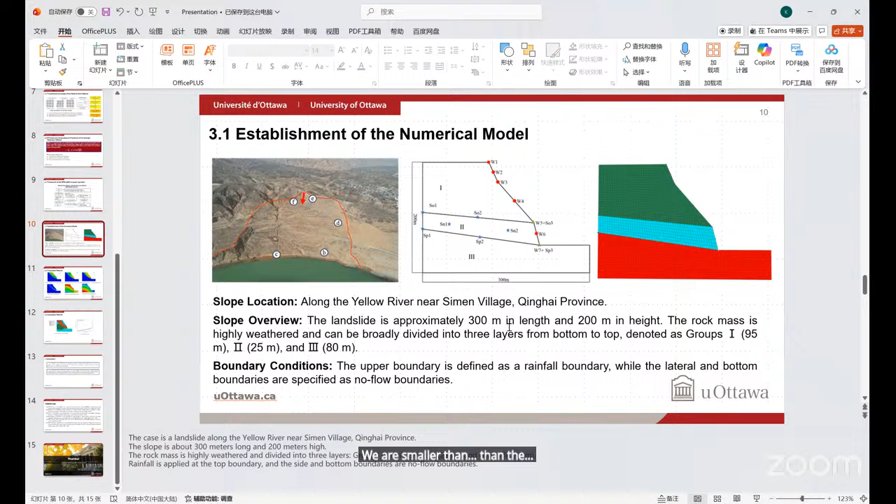Oh, actually I didn't compare, but I saw a paper about this question, and according to his outcomes, the safety factor will be smaller than with the finite element method. Okay.